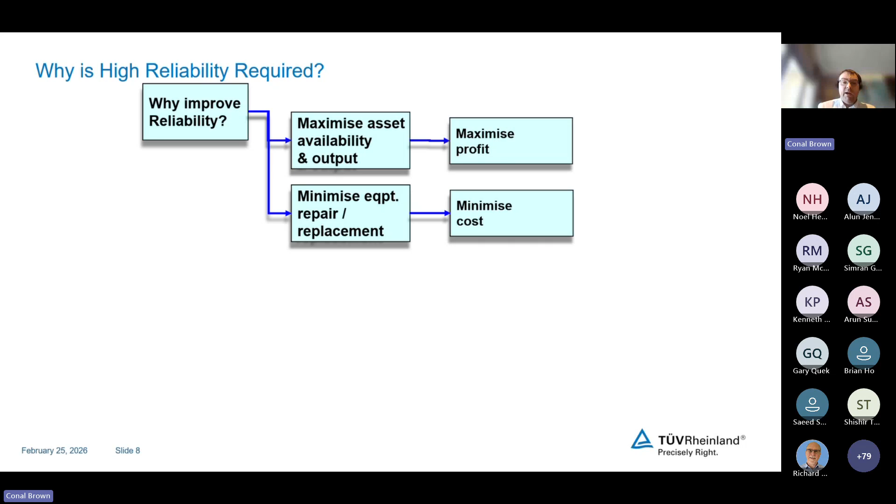But we also will minimize equipment repair and replacements, and that'll minimize the associated costs with that, so that'll improve our bottom lines.

But we also want to ensure asset integrity. That's to ensure safety, so we have a key role in supporting process safety management activities, but also personal safety. So things like machinery guarding would come under asset integrity, as well as the larger pressure systems integrity and inspection activities. And also we want to ensure that we don't lose containment and have adverse effects on the environment through contamination of air, water, or the ground.

And finally, we want to ensure product quality. So in certain process industry sectors, reliability can have a huge impact on quality, and that could be a result of lost product or reworked product.

We did do a study a while back for a company that had a capping machine to put the lids on vials of medical products, and it was a very unreliable machine. And every time it failed, it was an 8-hour complete clean, shut down, repair, and restart. So it took them a whole shift to actually get the machine clean and sterilized enough according to their good manufacturing practices that they were able to start up again.

So every failure of that machine had a massive impact on loss. They'd lose batches, they couldn't be confident in the product. So the quality issue in certain sectors is big as well around reliability.

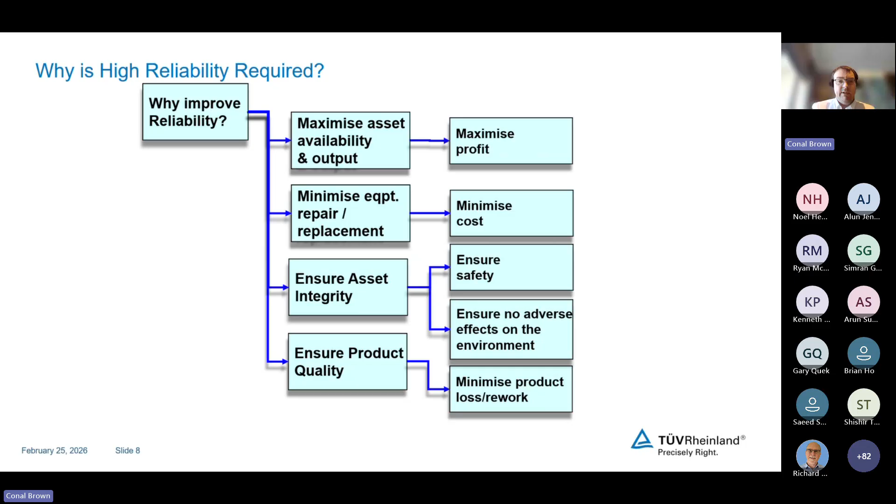So what do we mean by a reliability culture? Reliability culture is one where everybody at all levels is continuously involved in the identification, understanding, and application of appropriate reliability behaviours and practices throughout an asset's life cycle.

And you could probably copy and paste the word safety and put it in there, it's very similar. We don't go around saying that safety is the safety department's responsibility, so I can ignore things. Similarly around reliability, we don't want people to say that's the maintenance department, or that's the reliability department's problem. We want people from engineering, purchase and projects, all of the different disciplines to take ownership of how they can affect reliability of the asset over its life cycle.

So the culture comes through in terms of how well practice is applied in reliability operations and maintenance, people's competence and how competences are managed and how behaviours are managed. But you also then start to see it through some of the results, potentially better condition of assets, better reliability performance, and better quality of information. So you do see the effect of a good culture come through in multiple areas.

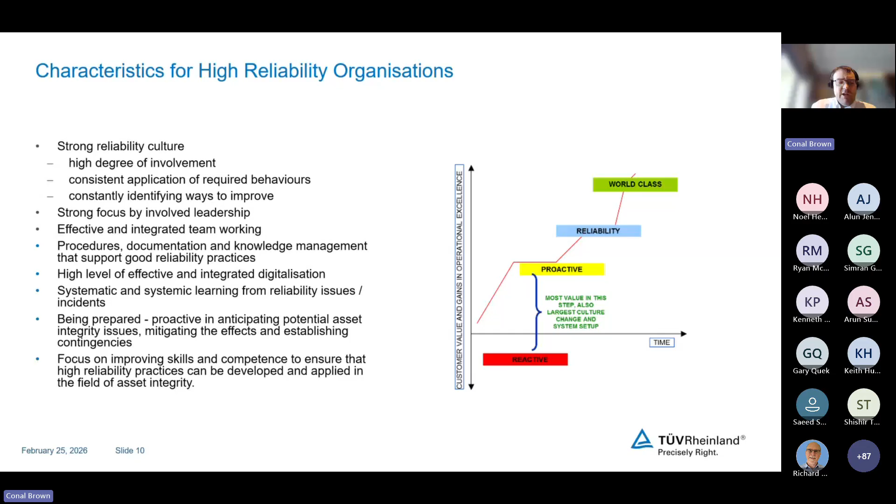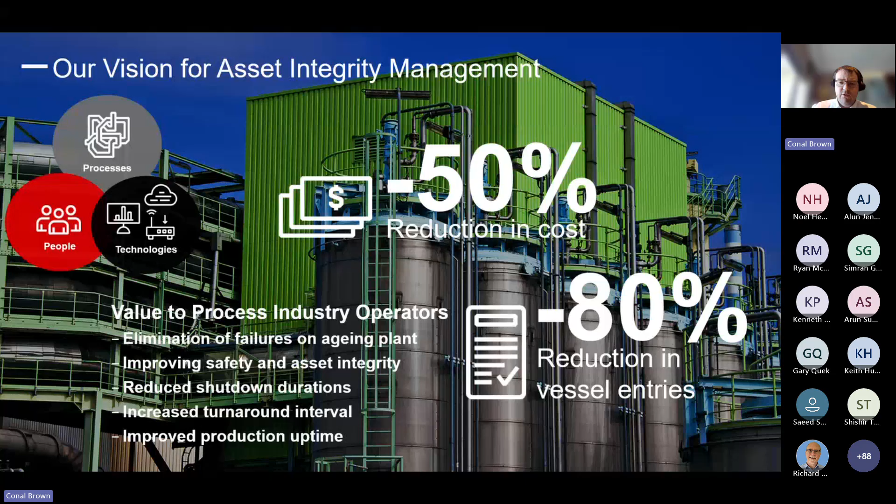Our vision for asset integrity as one element that supports a reliability culture is that through effective people, processes, and technologies, we can try to achieve a 50% reduction in cost compared to what might be considered good enough, and an 80% reduction in vessel entries through best practices, primarily through non-intrusive inspection. If we take a real effective look at how we manage our risks and our integrity issues, we see great potential for improvements in costs and the risks associated with vessel entries.

The value this brings to the industry is we can try to eliminate failures on aging plants, because we can get a better handle on our failures and our understanding of damage mechanisms through a high reliability culture and effective tools such as NII, to support an even better integrity assessment than you can get through visual inspection. This improves safety and integrity, and reduces shutdown duration, because we can either take work out of shutdowns or do inspections more effectively - perhaps we can just cool down a vessel, we don't need to isolate it or open it up.

Increasing turnaround intervals by maybe having intermediate inspections or a better understanding of our asset condition, and improved production uptime - we have fewer unplanned events where we need to take equipment offline, because we've got a more effective picture of our asset integrity.

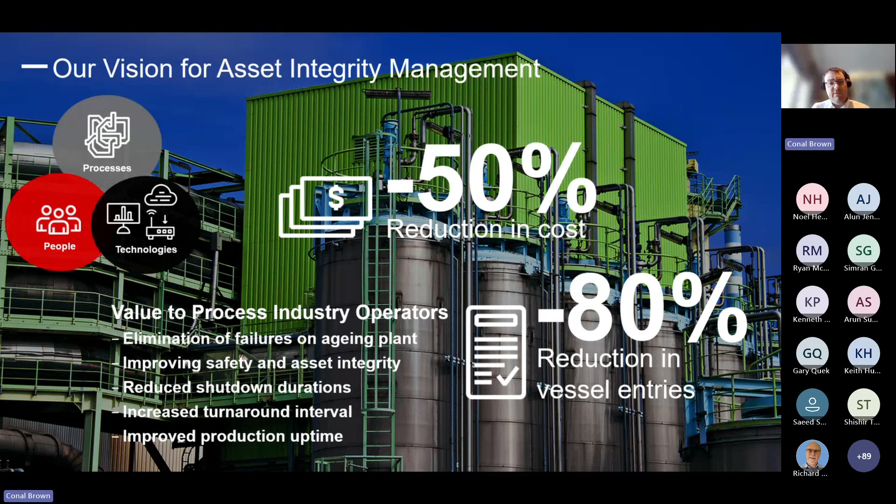This is a case study of a project we ran from 2020 through to 2024 with a Hungarian company called MOL, their downstream business. They've got 3 refineries - one in Slovakia, one in Hungary, one in Croatia - and a petrochemical site in Hungary as well.

They were trying to put together an integrated asset integrity management program. The strategic issues facing their industry include a long-term decline in petrol and diesel demand across Europe, so there's overcapacity in the industry. They've got tough competition in a difficult market, and aging assets - their underlying reliability is starting to decline as these assets age. They're getting into that bottom end of the bathtub curve, so they can't just continue with business as usual. These aging assets were leading to a high level of failures and unplanned outages to deal with integrity issues.

What they did have was 3 independent companies which had been bought by MOL, and they had different procedures, different ways of working. So they had a lack of consistency and standardization across the group, and local initiatives hadn't really achieved the improvements they wanted - there were pockets of good practice, but they weren't really getting sustained and spread out across the wider group.

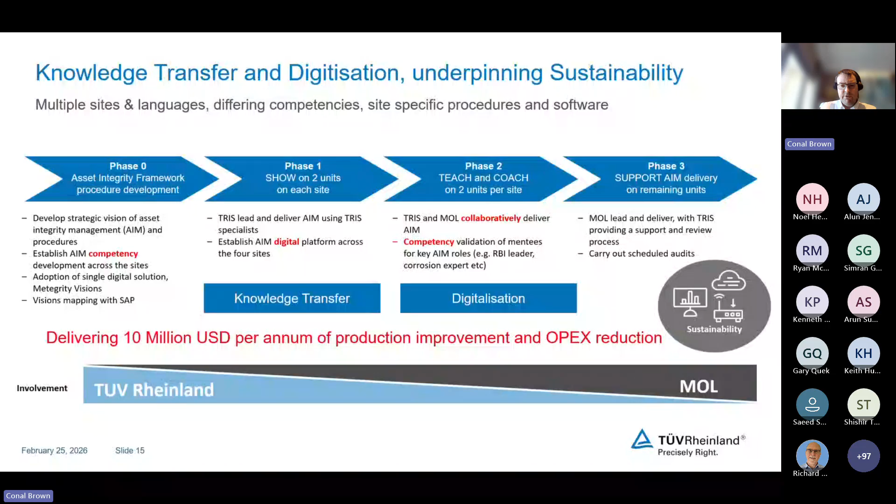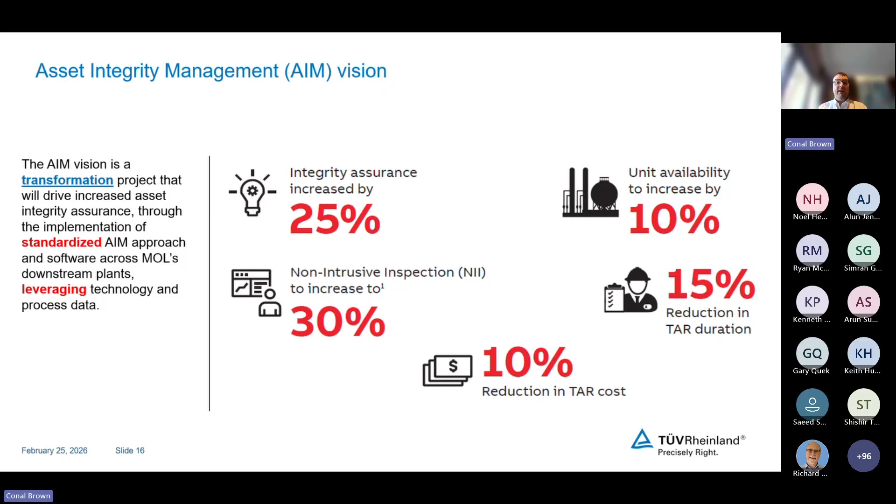We also wanted to identify opportunities where we could apply non-intrusive inspection. Although the legislation was still very much driven by internal visual inspection, we made a case - we did studies to show we could do a lot of non-intrusive inspection, and that has now opened the conversation with the regulator, because the shorter the turnaround, the more production and the more tax revenue the government gets. Where we're able to demonstrate that we can safely apply non-intrusive techniques, as good as or better than internal visual inspection, we're able to put a case together that's moving to the next stage of potentially changing some of the compliance-driven legislation and moving to a more risk-based approach.

Moving on to talk a little bit more about non-intrusive inspection. The traditional approach, internal visual inspection, intrusive inspection - we traditionally put an inspector inside the vessel to carry out a visual examination.

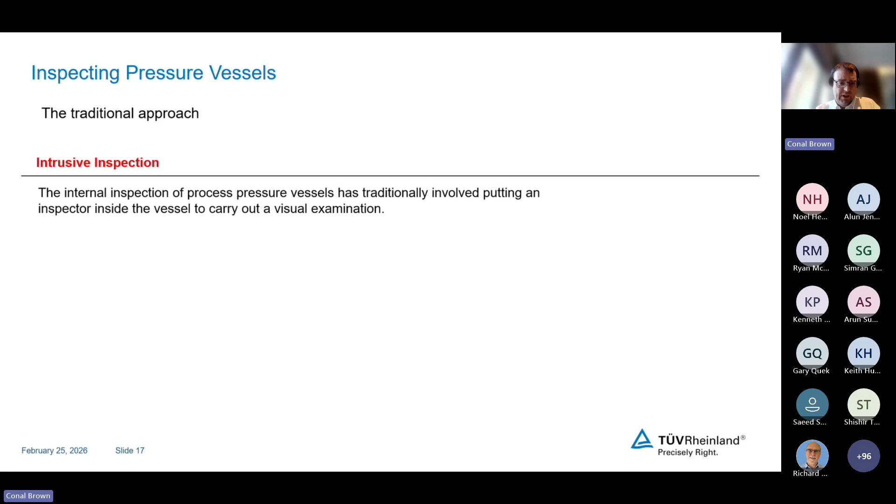Within the UK, and increasingly in other countries, there's no legal requirement to carry out an internal examination of a pressure vessel. All the examination needs to do is be effective at detecting the predicted damage mechanisms, and also provide sufficient information to enable the vessel's integrity to be assessed and considered suitable for operation until a future interval, which can be defined by the findings of that inspection.

So all you need to do is understand how well the equipment is withstanding its damage mechanisms, how well it's standing up, and then decide what would be a suitable examination after that. There's no actual requirement to do the internal inspection.

But if we do an internal inspection, we need to shut down the vessel, and there's a lot of work needed to prepare that vessel for inspection, to make it safe to put a human inside, and then also to return it to service afterwards.

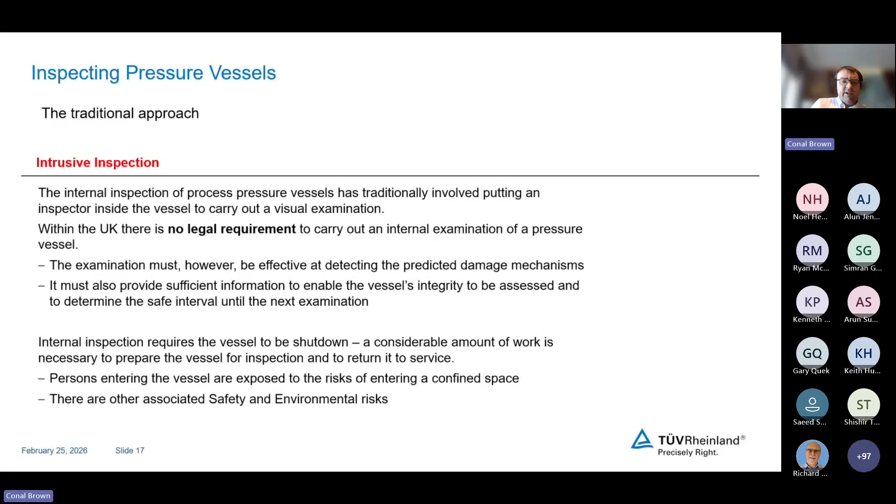Once you've returned it to service, there are risks of leaks at joints when you reconnect the pipe and repressurize. And when you do the inspection, you have the risks of confined space entry, and there are other safety and environmental risks to do with decontaminating and cleaning vessels, and what you do with that inventory.

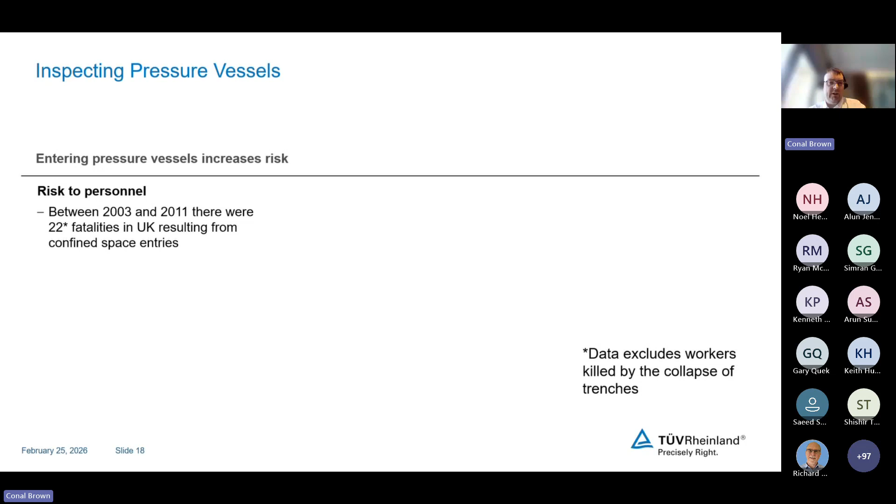So entering pressure vessels increases risk. Between 2003 and 2011, to take an example period, there were 22 fatalities in the UK resulting from confined space entry, excluding workers killed by trenches and collapse in trench work. Nine of those were a result of oxygen depletion, and 13 were due to other accidents.

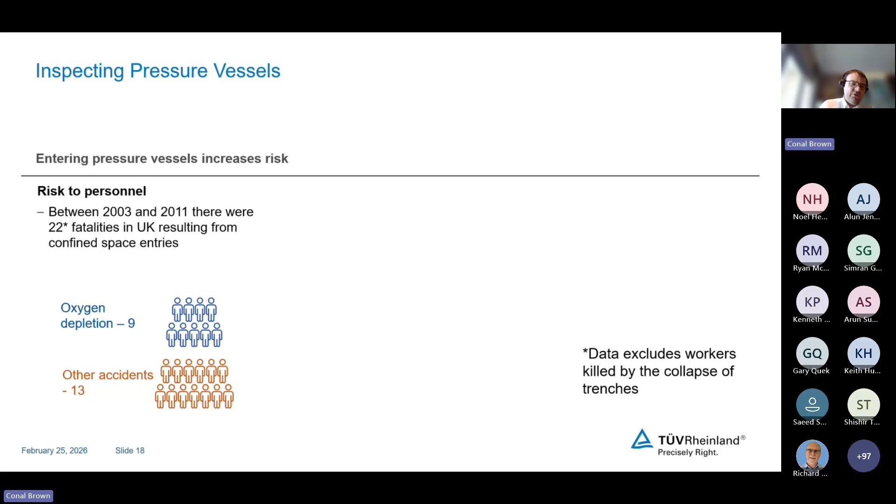So there are multiple risks associated with confined space entry. There's the asphyxiation risk, but there's also the risk that if something does go wrong, it's much harder to have a rescue and escape plan.

We also have this risk of hydrocarbon leakage when we prepare for a vessel entry. We need to break flange connections and then remake them, and that creates potential for leakage. So there are several risks associated with vessel entry.

When we're removing the inventory from that vessel, we might be flaring to purge the contents out, and then we've got to clean the vessel, dispose of that wastewater and any residual contamination that's in there, and deal with any fugitive emissions associated with flanges which haven't been resealed adequately.

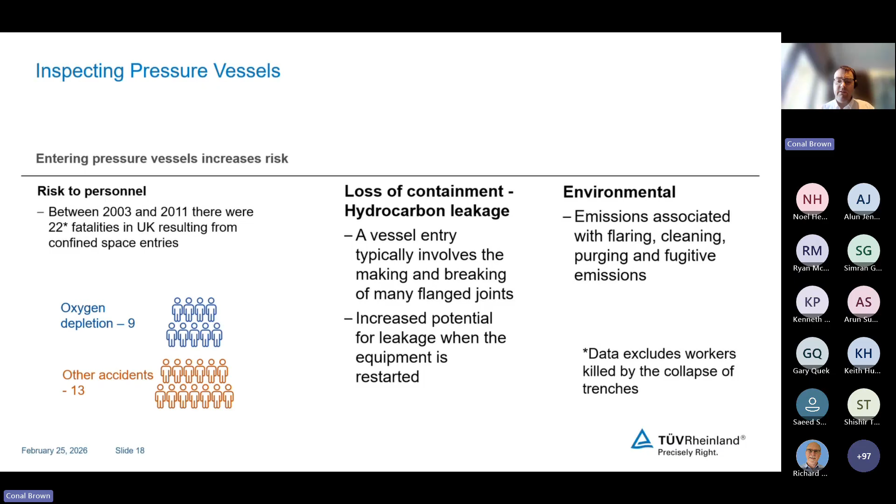So if we do non-intrusive inspection, inspecting from the outside of the vessel, we avoid that requirement for entry into a confined space to perform the examination.

There is increasingly a sort of halfway house, which is robotic inspection. We still need to do some preparation for a robotic inspection, but potentially not quite as much as for human entry. But for NII, we're talking about inspecting from the outside totally.

In some cases, the inspection could be undertaken with the equipment online. It might depend on the operating temperature, and it might depend on the associated risks of being close to equipment. So it can sometimes, but not always, be undertaken with equipment online.

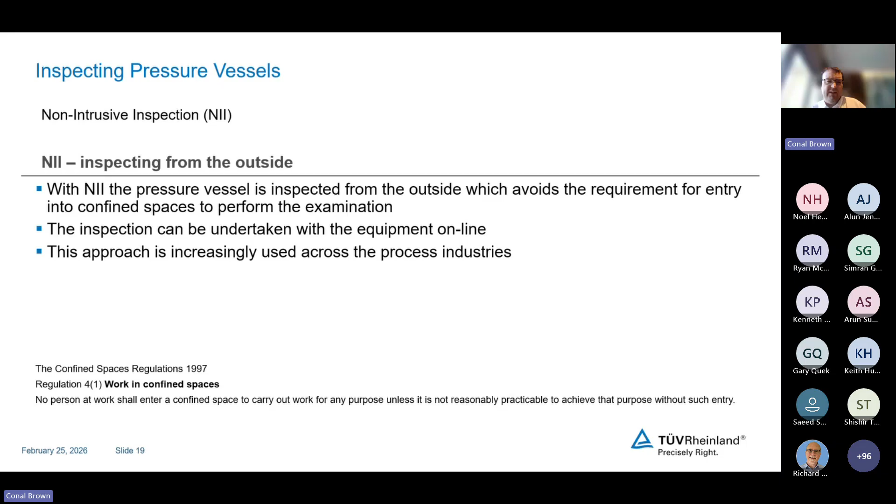It is finding increasing adoption across the process industries. As the NDT techniques get better and the data processing capability gets better, it becomes increasingly viable, and it's becoming increasingly adopted across process industries. It has delivered significant improvement and financial benefits without compromising process safety, and we've got some examples of that later on in the presentation.

But it does require a high level of understanding. You do need to have a good corrosion risk assessment and risk-based inspection plan. You do need to really understand the deterioration mechanisms, and not every vessel is suitable for non-intrusive inspection.

Either there's some sort of geometry which prevents inspection of areas of concern, or the nature of the degradation means that it's not possible to predict the locations where damage could be occurring, or the severity of the damage could be so high that NII is not recommended. There's a guidance document that can help you make those decisions.

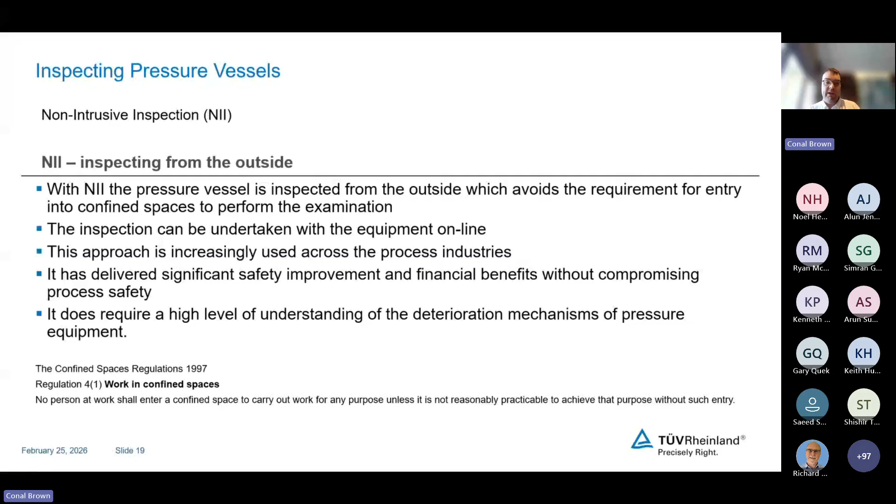So in 2017, we did a study with the Oil and Gas Technology Centre, now the Net Zero Technology Centre, to see what the potential is for implementing non-intrusive inspection in the offshore sector in the UK. We found there was a potential saving of $500 million a year from a combination of increased production and reduced process and mechanical costs.

So if everybody who wasn't using NII techniques were to adopt them, given the typical vessels you might find in the offshore sector, what benefits could we find for the industry? And then also, what was the industry readiness - what barriers needed to be overcome before people felt ready to adopt NII?

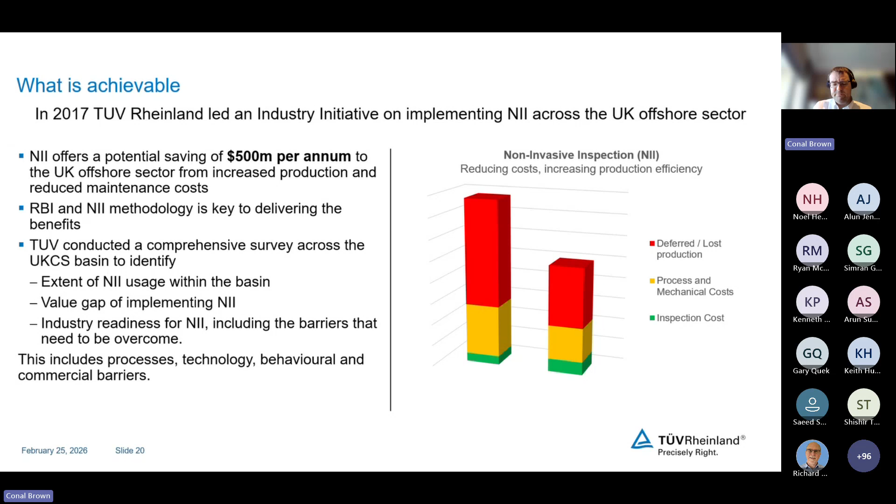The barriers were process barriers, technology barriers, and also behavioural and commercial ones - a mixture of issues were preventing it. We found that typically 85% of pressure vessel inspections required equipment to be shut down and isolated, and 95 to 97% of the cost of that invasive inspection was the enabling work and the lost production costs. Maybe in onshore process industries the lost production costs aren't quite so high, but the enabling work still has a significant cost.

Generally, we found that for a lot of companies, NII wasn't even considered. They had policies where intrusive inspection was generally mandated, and RBI even is often not used or has not really been effectively applied. So the real risks weren't being understood.

I guess a thought would be: what could be the biggest obstacle to change in the onshore sector? We certainly found that just doing what they'd always done was one of the big barriers in the offshore sector. But the cost pressures they've seen from 2017 onwards have created a lot of change in that industry since this survey came out.

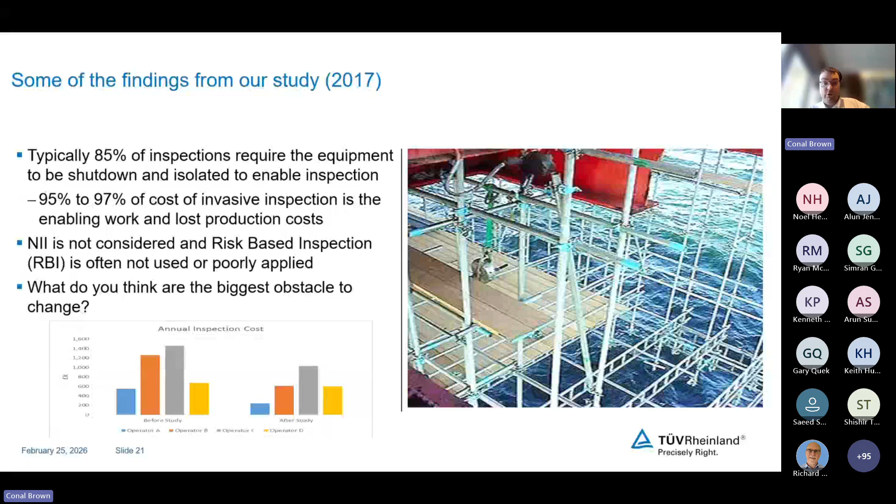You can see that across operators there were different degrees of savings, because they were at different levels of RBI effectiveness and NII effectiveness. But all operators did find that there was potential to reduce NII inspection costs, or total cost of inspection, from NII.

Then other studies we've done - these are real studies for real companies. For an onshore refinery, we looked at 164 vessels and found that 58% of those were suitable for NII. A study we did for BP in the Caspian region of their offshore platforms looked at 261 vessels and found 56% were suitable for NII.

For a third company, we looked at a mixture of onshore and offshore assets and again found 60% were suitable for NII. So that 55 to 65% region is entirely plausible for achieving a reduction in the number of vessels that we have to do internal inspections for. There's potential for significant benefits from adopting non-intrusive inspection.

We can improve safety and production through non-intrusive inspection, and we can also take advantage of increasingly advanced NDT techniques. Even where we can't perform non-intrusive inspection, we can do things like replace radiographic testing with TOFD and phased array, so we don't have to do inspection work at night and plan the radiographic work for night with other activities during the day. We can compress shutdown periods by doing advanced NDT alongside other maintenance work inside the turnaround.

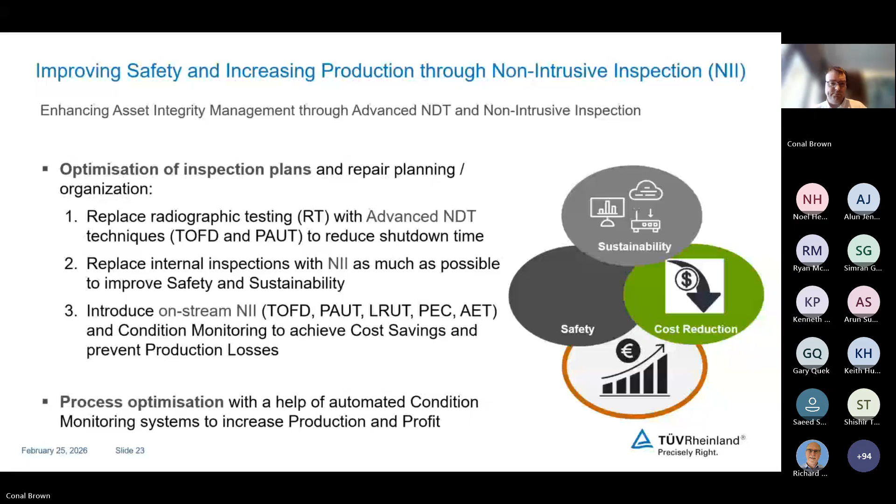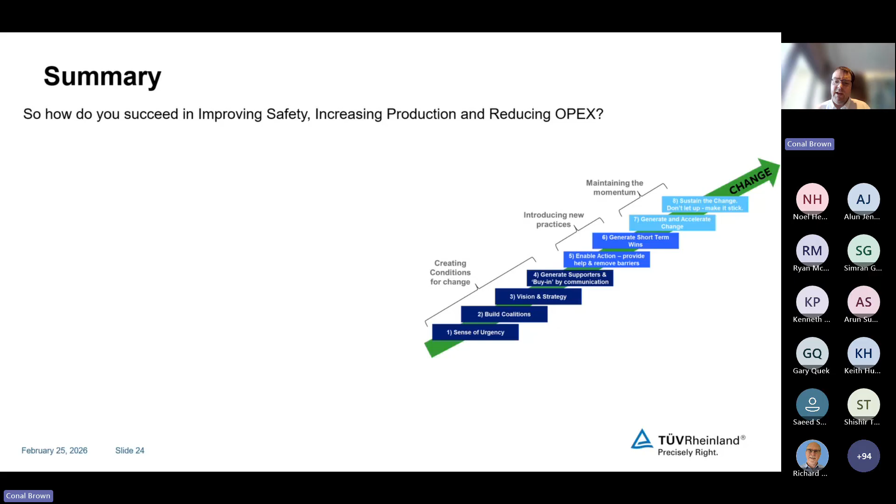So then, in summary, how do you succeed in improving safety, production, and reducing OPEX through improved asset integrity and adoption of techniques such as non-intrusive inspection.

Well, you need to understand that the project is first and foremost a transformation and culture change project. It's not merely just an introduction of new processes or new technologies. You're really changing how people think and how people behave.

So if you see this change management model on the right hand side, you need to create the conditions for change. You need to have that sense of urgency, why we should change, and then you need to build a coalition. So get enough people from the leadership level, the engineer level and the technician level who are willing to make that change happen.

You need a clear vision and strategy so that you've got a guiding star you can all line up behind. And then beyond that core team, you need to generate supporters and buy-in across the wider business through communication.

And then when you do introduce new practices, provide help and reduce barriers. Do what you can to make things easy, take away the pain, generate short-term wins. Think about how to sequence things so you can get a real short-term benefit. If there's any particular upcoming turnarounds, can we do work for that specific turnaround, get those quick wins?

And then you need to maintain the momentum. You need to build that capability internally within the business so that it does change. That will require continual pushing from the leadership level, from the engineering level, and also within the inspection and maintenance technician level. So everybody's got to push the change.

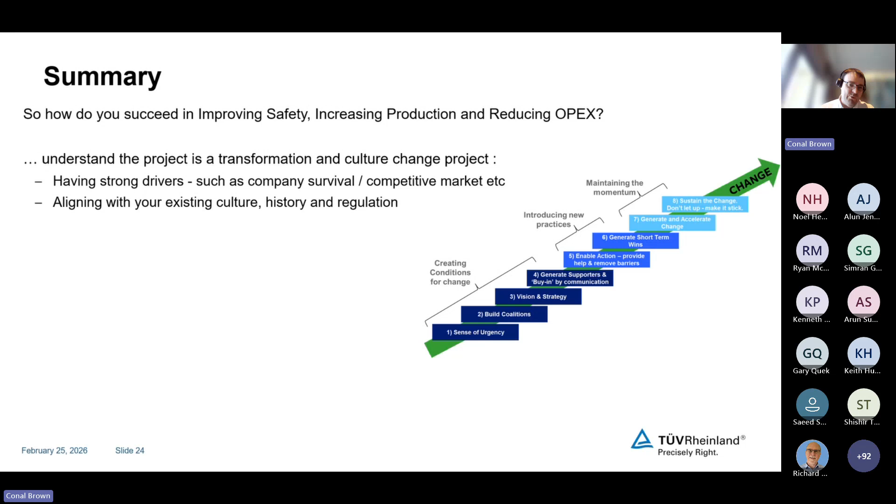Align with your existing culture, history and regulation. It's different within every company. Take advantage of it. Do things that fit with how people already think, and use that. Don't use that as an excuse. Use it as an asset to drive things in a particular way.

Get senior management involved and engaged, and have that vision and energy come from them. They need to pull this from the top. But then also build that commitment and support for change throughout the organisation. Get it there at multiple levels.

Challenge the regulatory compliance. It is possible to get away from just the regulator says we need to do it, so we'll do it. You can say, well, we will do it, and how about changing the way we do it in the future? So with data and evidence and a good understanding of your assets that you can prove to the regulator, it is possible to start the conversation to make a change.

And then also be transparent. Much better to have indicators which tell a mixed picture than indicators that say everything is green. Be transparent and admit that things need to continually improve.

And then also make it stick. It's not easy. Asset integrity, you can't give up. Everything on that asset register needs to be considered. But you do a risk-based approach, so you look at what's the most critical equipment, focus the effort there. But you do need to keep that effort going throughout.

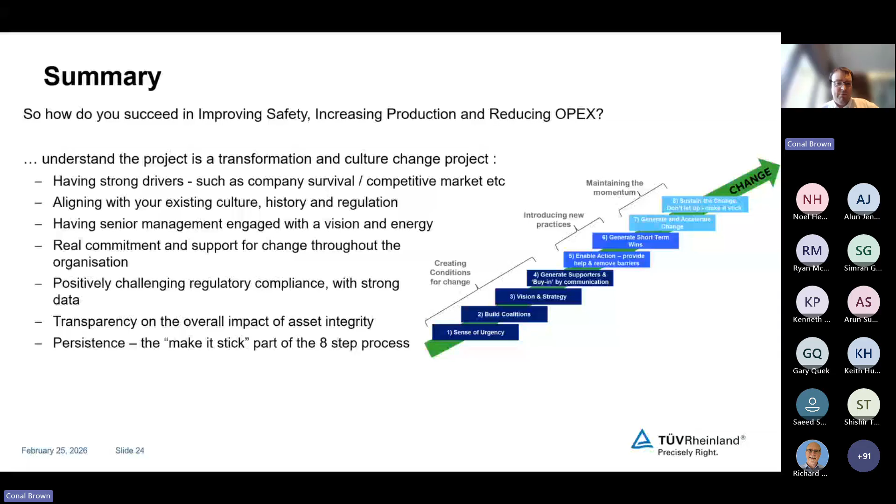Thank you. Should I hand back now? You can just leave that screen up if that's okay. It's fine for now.

Brilliant. Thank you, Conal. And that gels with so many things that I've come across in my career. I don't know what Ryan's view is on that. I'll just add a couple of comments before we start chatting.

You said this, but maybe not strongly enough: don't pick techniques that avoid entries just because they're easy. Competent inspectors and engineers to interpret are important, because otherwise we could end up with unsafe situations. But nevertheless...